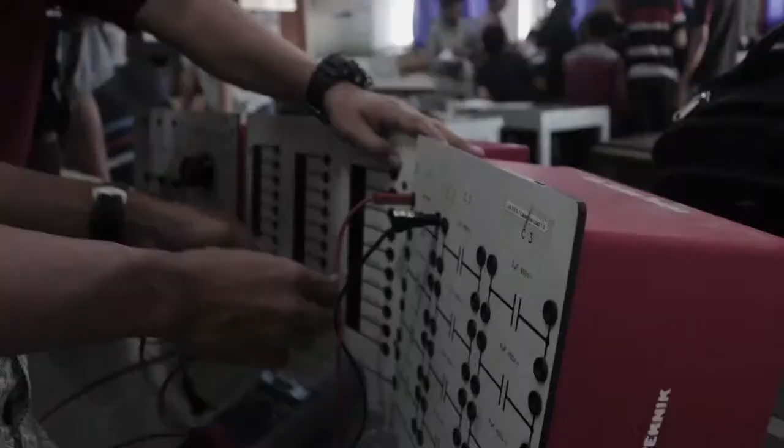Nurturing talented youth to become future leaders who eagerly pursue the truth based on faith and piety gives Mataram University a firm ground to contribute at its best to the society. In 2018, Mataram University is ready to answer the call with 9 faculties, 58 departments, study programs, postgraduate programs, vocational programs, and diplomas.

Faculty of Economics, Faculty of Animal Husbandry, Faculty of Agriculture, Faculty of Law, Faculty of Teacher Training and Education, Faculty of Engineering, Faculty of Mathematics and Natural Science, Faculty of Medicine, Faculty of Food Technology and Agro-Industry, and Study Programs including Communication Studies, International Relations, and Sociology.

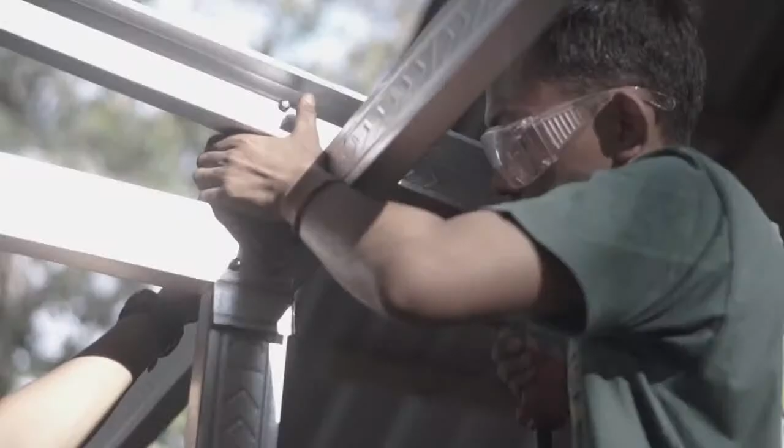We have tasted the same hard times. We have swallowed the same sour times. We have passed through the storm of challenge and stayed strong.

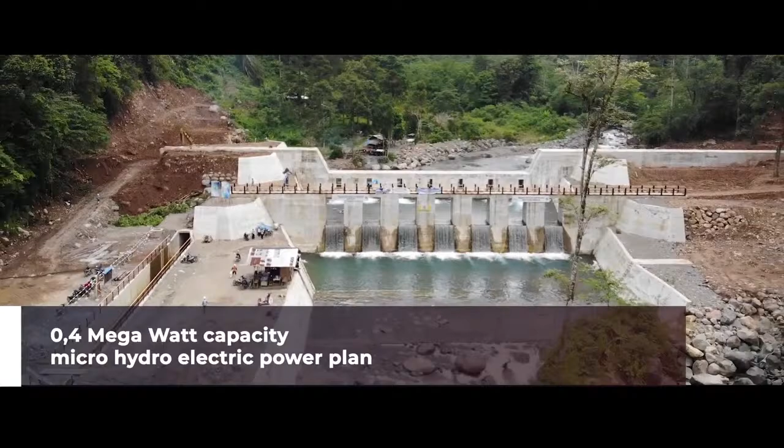During their studies, students are involved in character building, reflected in a variety of relevant activities, engaging faculty members and communities. Summed up in the acronym SEJATI, which means patient, empathetic, honest, fair, responsible, and sincere.

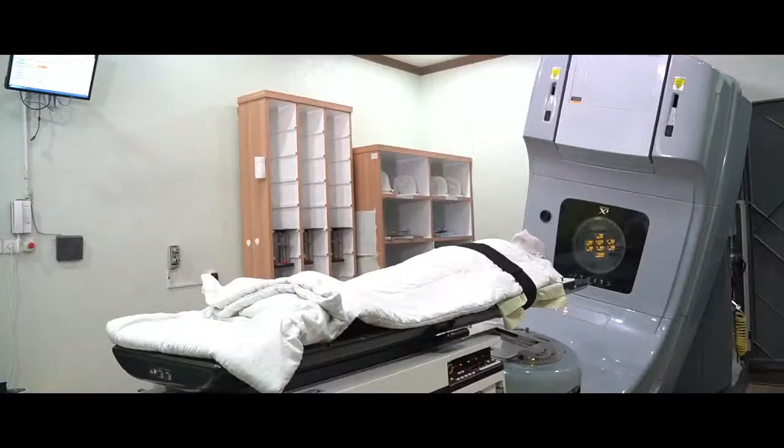Interdisciplinary knowledge, in consultation with key industry experts, enables the faculties to develop programs that will better prepare students for working in industry. It has resulted in close industry links being built through strategic alliances with trade associations and key industry partners. Here the student is not only the dreamer, but also the doer who is proud of making things happen.

Andalas University is committed to realizing its vision of becoming a leader in innovative university education by integrating learning, industry, and community.

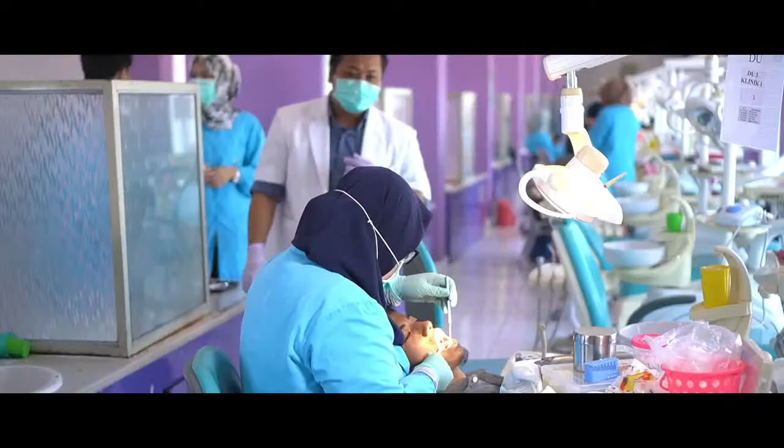The university always encourages lecturers to create innovations based on science and technology, which are then delivered to the community through research institutions and community service.

Andalas University applies continuous quality improvement, improving internal quality through conducting internal quality audits, and designing a curriculum that meets the needs of stakeholders, that is, the world of work and industry.

In an effort to produce graduates who are highly competitive, Andalas University also prioritizes entrepreneurship education for students.

In an effort to be an international campus, Andalas University is preparing to become a state university. Various efforts to this end continue to be conducted.

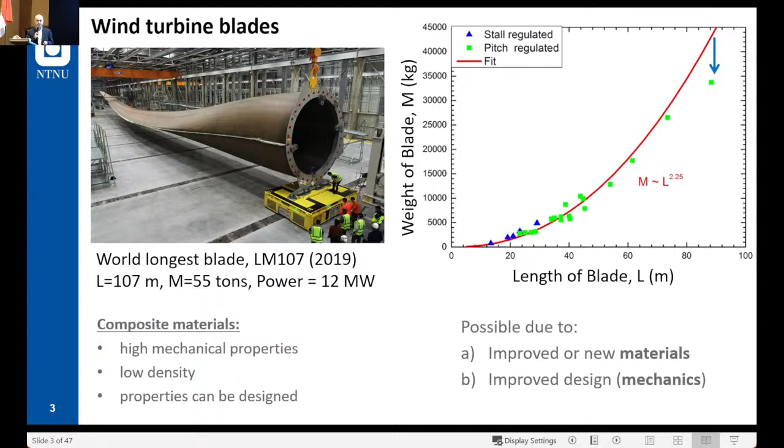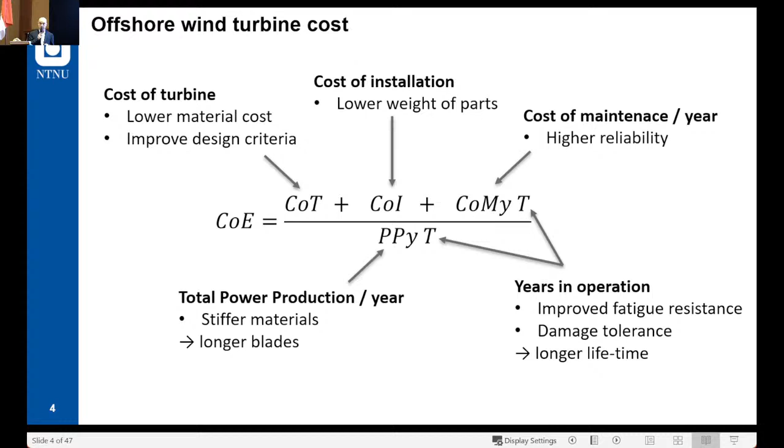Now imagine that through better materials and better design, we can reduce the weight of the blade by 20%. This will have a direct effect on the levelized cost of energy by 2%. This 2% is a quite high number if we imagine that the farm will operate for 20 or 25 years. So we can see how important it is to reduce the blade mass.

Now imagine that we can use very expensive composite materials like carbon fiber composites, and we can increase the blade length by 50%. That means we produce a lot more electricity. However, the levelized cost of energy increases by 2%. That's a very typical example in engineering - you always have to find a balance between performance and cost. The best material doesn't mean it will give you the best outcome, and my presentation later will reflect this balance between cost and performance.

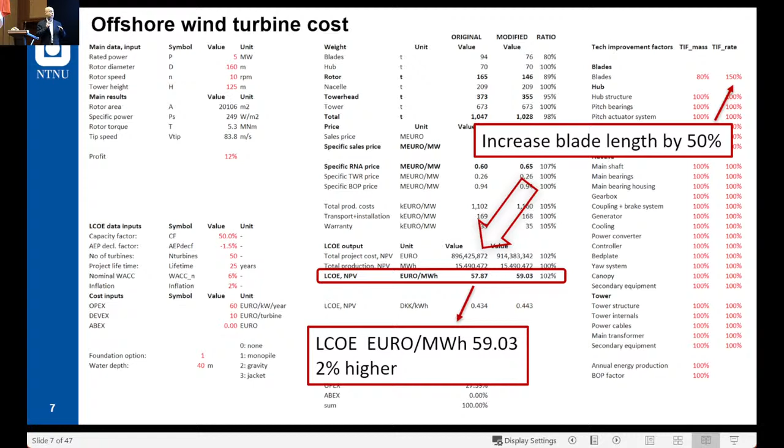So if one wants to calculate or optimize the design of a wind turbine blade or any composite structure - what I'm presenting here, I'm using turbine blades as an example, however the method is applicable to other structures like aerospace structures - we have different scales. We start from the structural scale, which is the blade.

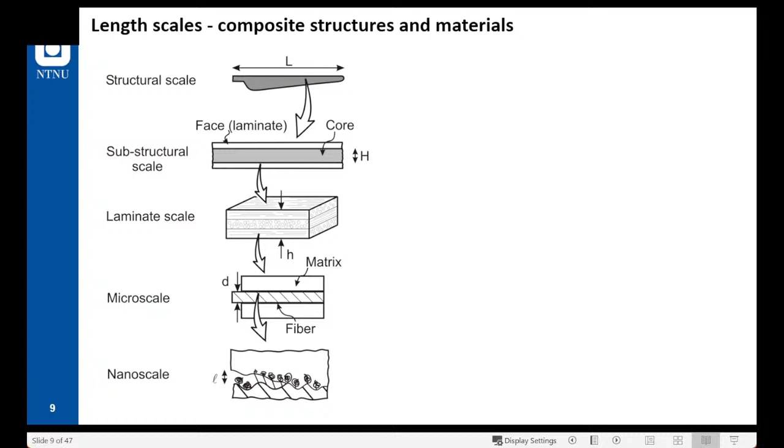At different scales, we have different damage modes. I won't go through the full list, but at the structural scale, we can see deflection or buckling. At the component level, we can have delamination between the skin and the core. At the laminate level, we can have fatigue or transverse cracks. At the micro scale, we can have fiber failure, matrix cracks, or fiber-matrix debonding.

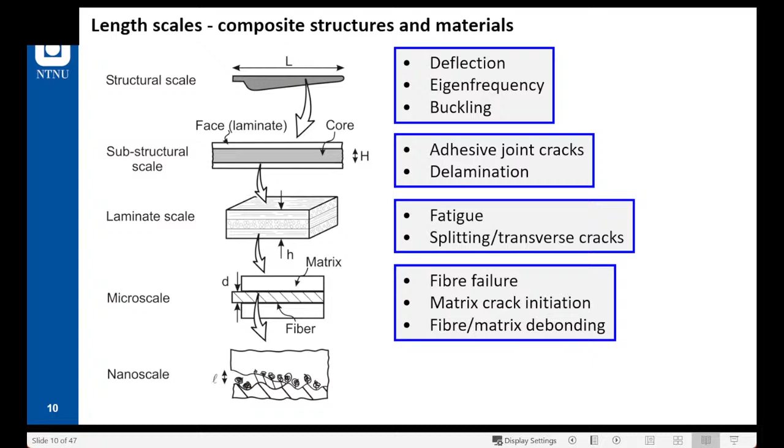As we move to longer blades, it's very important to introduce the concept of damage tolerance, or damage-tolerant structural design. That means our blade should be insensitive to defects, or in other words, the first mode of damage should not lead to failure of the component. Secondly, we have to develop damage-tolerant materials and interfaces, meaning damage should evolve slowly, or sometimes even stop growing. But it's also important that the damage grows to a size that can be detected by non-destructive techniques. That's the only way we can understand that our blade is being damaged at some location.

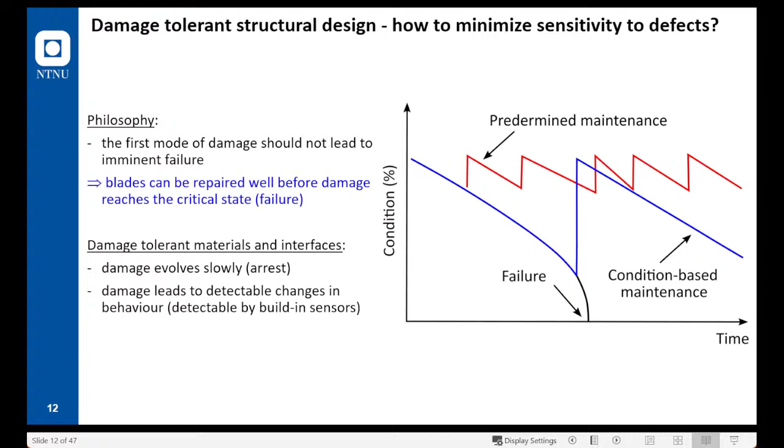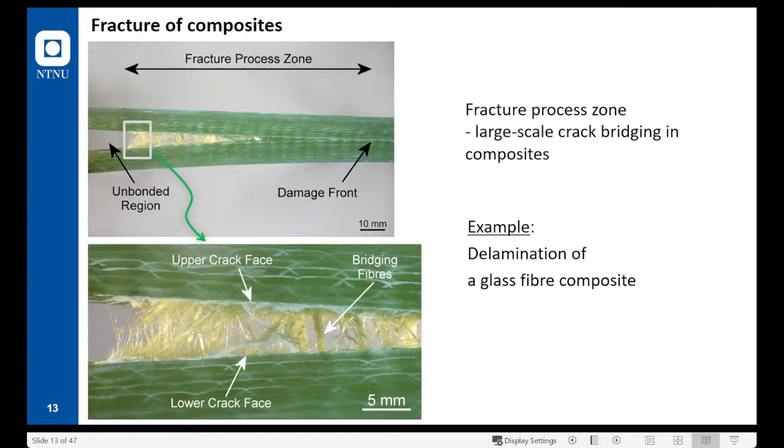Now, from these observations, we have to move to a mathematical tool that we will use in our design. The tool I will use is called the cohesive zone, where the damage zone we saw before—the crack tip here and the bridging fibers—can be replaced by a traction separation law.

One will notice there is a difference here. Usually in mechanics we have a stress-strain curve, but I have replaced the strain with opening. Since opening has units of length, we directly introduce a length scale into our calculations, and this length scale is directly related to the microstructure of the material. It's also one way that allows us to move from one scale to the next when we model a structure.

Now let's see in more detail what a cohesive law is.

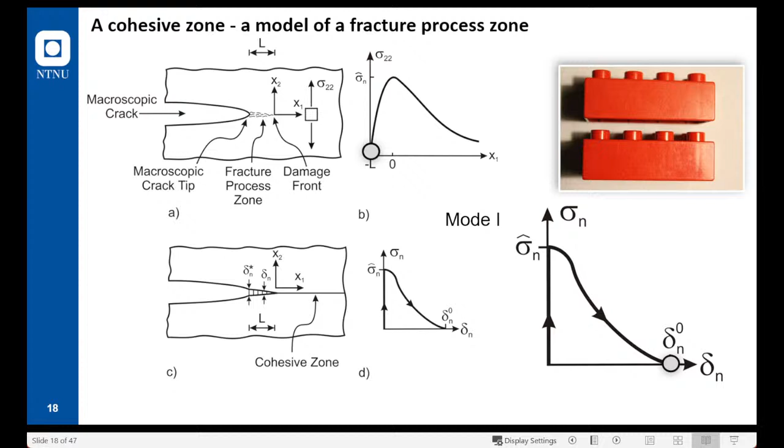Now I have defined the concept of cohesive law. The next step is how we can measure cohesive law in practice, because a cohesive law is a material property, so one should be able to measure it from experiments.

For simplicity, I'll give only the mode 1 cohesive law: normal opening on the x-axis and normal traction on the y-axis.

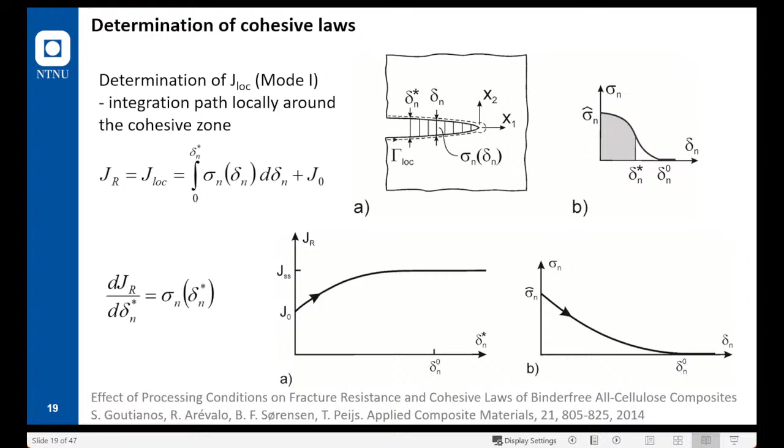When one develops an experimental technique, one should try to avoid errors. In most cases in the literature, the force is applied by forces. Here we apply moments, and when you apply moments, the J integral is independent of the crack length, so you don't need to measure the crack length, which can introduce a lot of errors when you calculate the J integral.

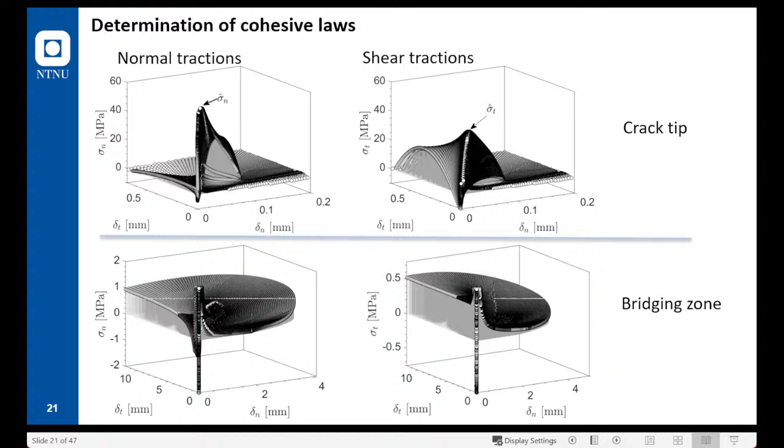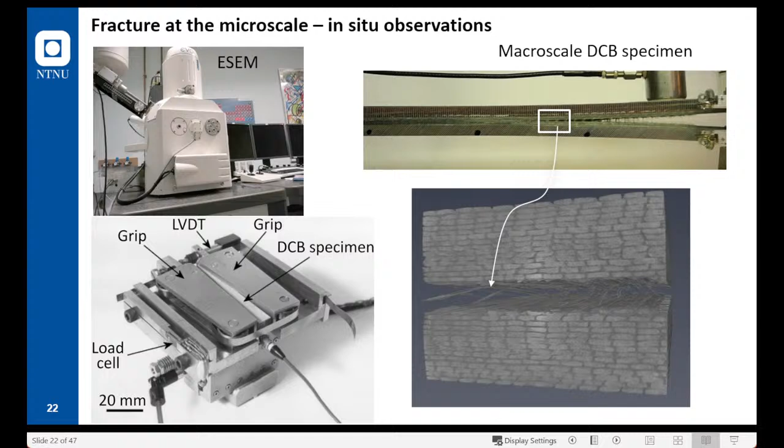By doing such an experiment, we can understand how damage starts to initiate at the micro scale, and eventually evolves into a crack at a higher scale, in the macro scale and at the component level.

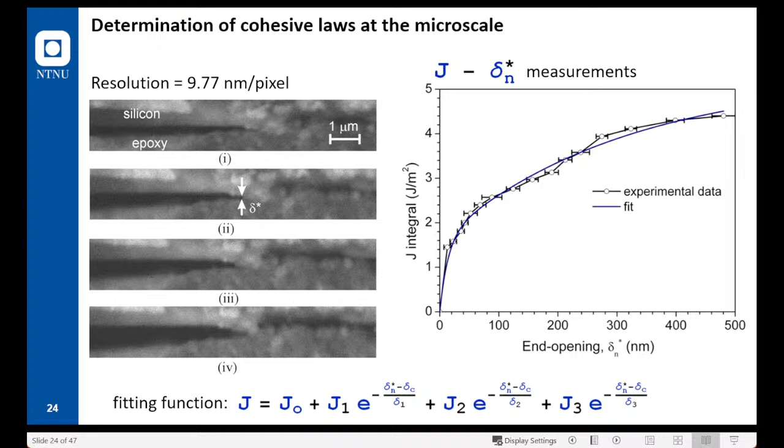We can also extract the cohesive law at the sub-micron scale. I have used the same fixture as before, and a silicon plate to model the surface of a glass fiber attached to the epoxy. In principle, we examine the cohesive law between the fiber and matrix. Again, we increase the load and record the end opening and the J integral, and the derivative of that gives us the cohesive law at the interface, which can be used in a finite element code.

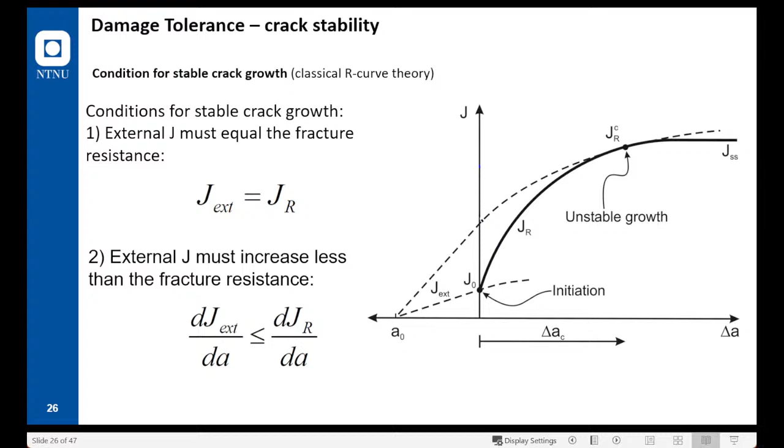Now I will talk a little about crack stability. We have said that damage tolerant means that the crack grows slowly. That means the energy provided to the system as the crack grows should be lower than the derivative of the fracture resistance with respect to the crack length. I have skipped many equations in between, and this is our criteria for crack stability. It's a nice equation because it says that both the material properties through the cohesive law and the structural properties will affect the crack stability. Again, both material science and mechanics are necessary to obtain a damage-tolerant composite structure.

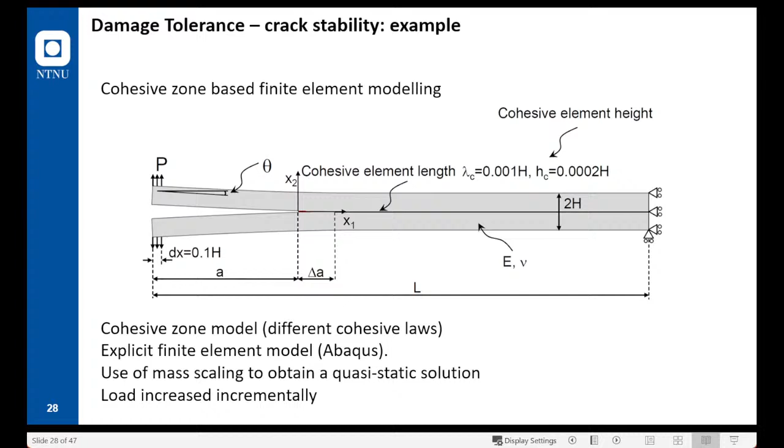Based on these results, we went back to the lab, and through chemical modifications at the fiber matrix level, we were able to modify the fracture energy corresponding to the bridging zone, and we were able to increase the fracture resistance of the composite by 3 times. So from the modeling, we went to the experiments, modified the material, and managed to increase the fracture resistance by 3 times.

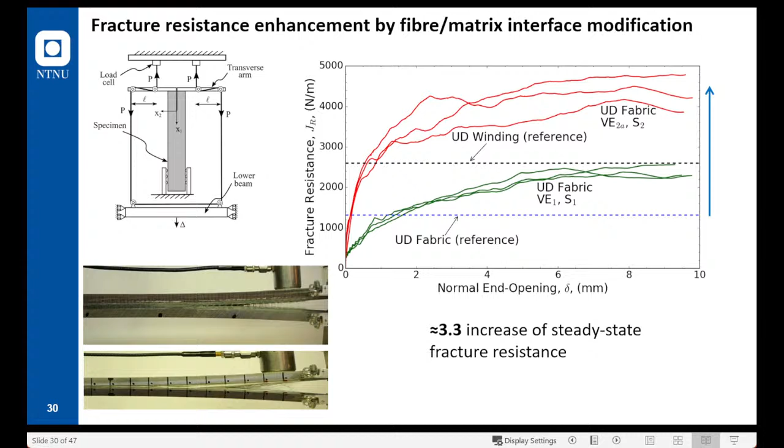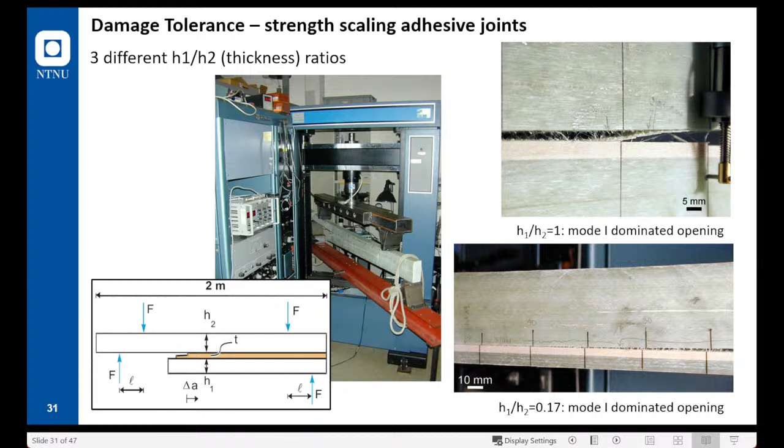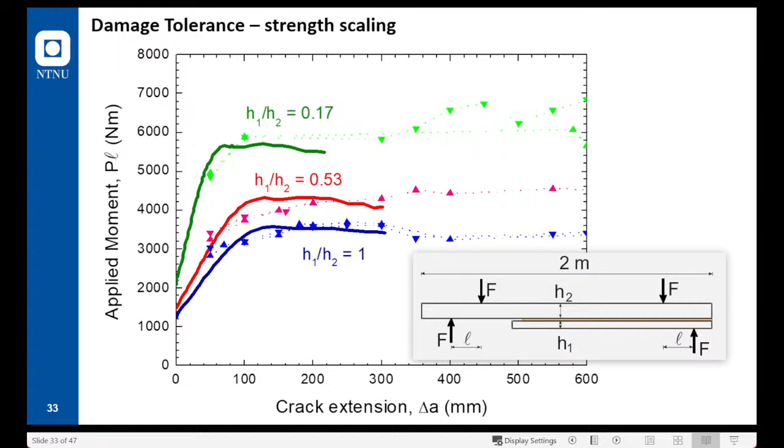In practice, we do experiments at the macro scale. You can see the length of the specimen here. We extract the cohesive laws for different mode mixities, and we model the behavior of the specimen. We can see that we can predict quite well the behavior of the 2 meter beam from data from the different lower scales. So we see how the cohesive law can be transferred across the different length scales.

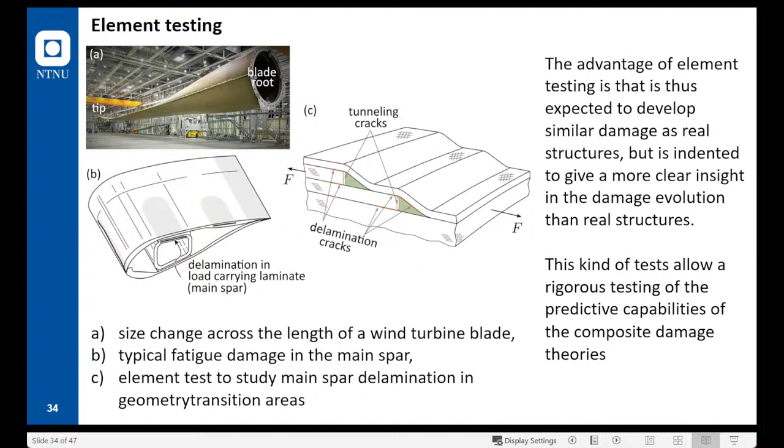When we design a component, quite often we base it on specimen testing. In practice this is not always the best approach because we have many structural features that initiate cracks. So we have to move, as is happening nowadays, from component testing and specimen testing to element testing, which can represent structural design features in a simplified way. We have accurate load introduction, and we can follow how the cracks will evolve with the number of cycles. And we can make damage failure maps and identify which crack is the critical one.

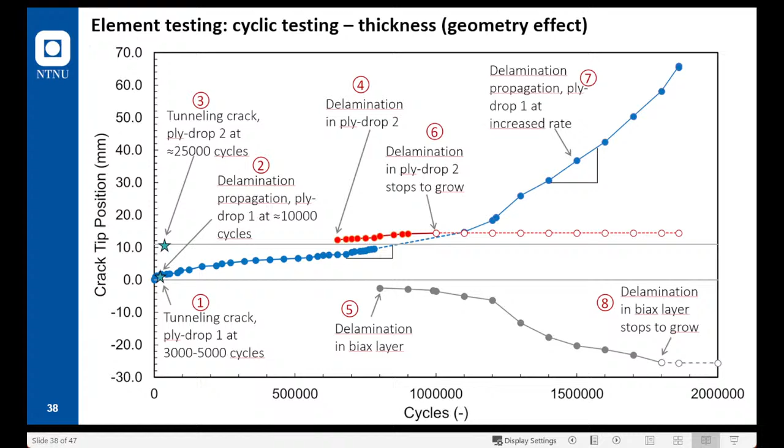I can skip this slide. Now, instead of conclusions, I will talk about future trends, because the time is almost over.

Nowadays, we are moving to probabilistic design, and the design now is based on calculating how many blades we are allowed to fail. For example, based on our design, we can allow that one blade will fail out of 100 blades. The drawback of this probabilistic design approach is that it says one blade will fail, but not which blade will fail.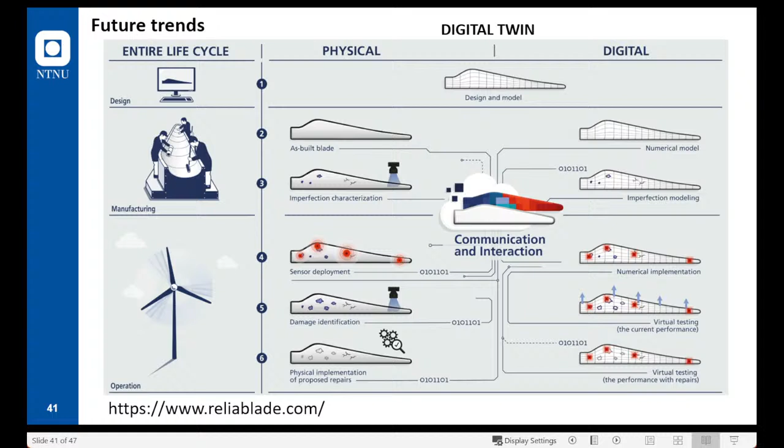And that's why now we move to the digital twin approach, where we have our physical wind turbine blade. All the manufacturing imperfections or processing details can be transferred to a digital model. In the same way, all the damages, when detected, can be transferred to a digital model where we can make predictions and decide how we can operate our wind turbine blade. And with that, I would like to thank you for your attention.

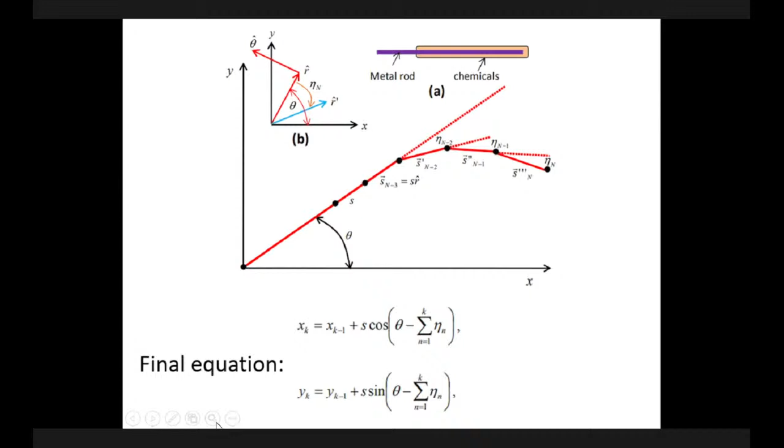Maybe not many people ask this question, but I thought this is very interesting - maybe a physics equation can be used to explain this phenomenon, this geometry. So our work was to develop a physical theory and equation to explain the bending behavior and geometry of the firework. We proposed a hypothesis, derived the equation, and finally obtained the equation to explain the bending of the firework rod.

This is the equation, and we also did an experiment using a fire rod about 40 centimeters long. The comparison between our theory and the data is pretty good. The black one is the experiment, and the colored one is our theoretical prediction. This is a very nice agreement between our theory and the simple experiment result.

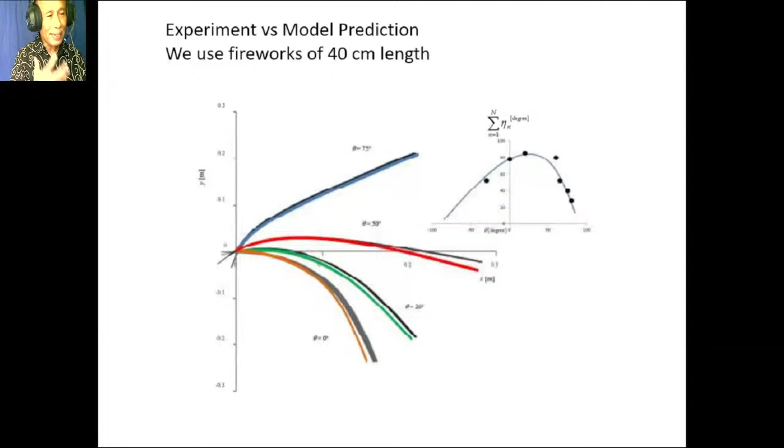Now, what is the price, the budget for this research? It is about several hundred thousand rupiah, less than 1 million rupiah. So with a few hundred thousand rupiah, we can obtain one paper in a very reputable journal in physics related to education. We obtained this paper just by buying fire rods, several packs, developing theory, doing a simple experiment, and then obtaining the data.

This is the next one. We always do this, maybe every day: before drying the clothes, we rotate the cloth to remove water, then put it under sunlight, and then the cloth will dry. This is simple, we do this every day, but we never think about the physics behind this activity, the science behind it.

Our observation is, if you do this at home, if we rotate the cloth, at first the water doesn't come out. But if we rotate many times, the water comes out, and as we increase the rotation number, the water stops. The question is, are there physical equations to explain the coming out of water when we turn the wet cloth?

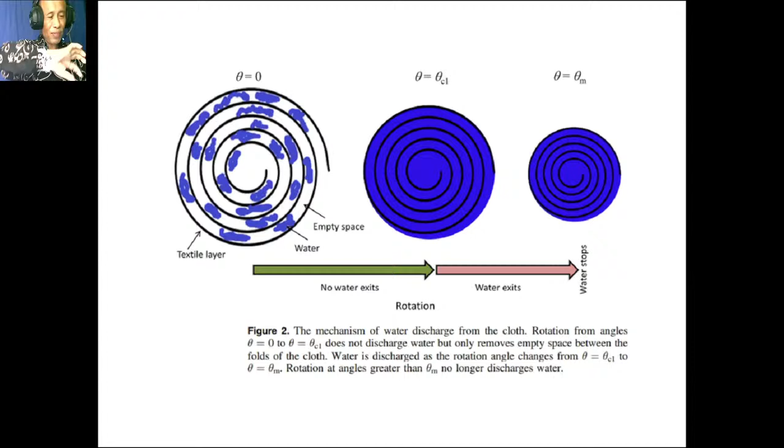So we derive a physical equation to explain the process. We hypothesize that initially the cloth contains water and also empty space between water inside the wet cloth. If we rotate the cloth, we just remove the empty space. If we rotate again, we remove water, and then finally we cannot remove anything. This is our hypothesis for the process of turning the wet cloth.

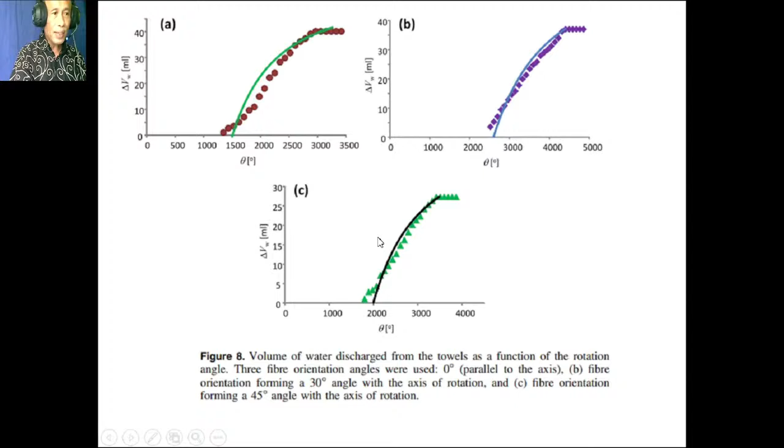We find the symbols represent the experimental data, and this is the theoretical prediction, our model results. Finally, we compare all of the experimental data, and it falls in one single equation from our theory. We see that the experimental data are in agreement with our theory. This is experimental data for many kinds of cloth, towel, and batik.

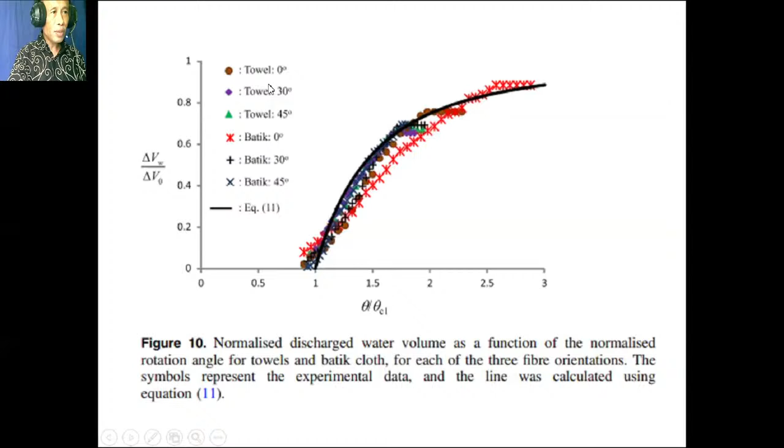Finally it ended up in this paper, also in the European Journal of Physics. This is related to education, but it is a high quality journal in physical science.

If we observe, just by folding and rolling, the sarung attaches strongly to our stomach. If the number of rolls increases, the attachment gets stronger. And if the pressure of the sarung on our stomach increases, the attachment is also stronger. So the question is, are there any physical equations to explain this phenomenon? It's an everyday phenomenon, we do it every day, but we never think about it.

So I did experiments to measure the pressure between the sarung and stomach. This is me, I did the experiment at home, and we designed a simple experiment by measuring the difference in water level inside the pipe.

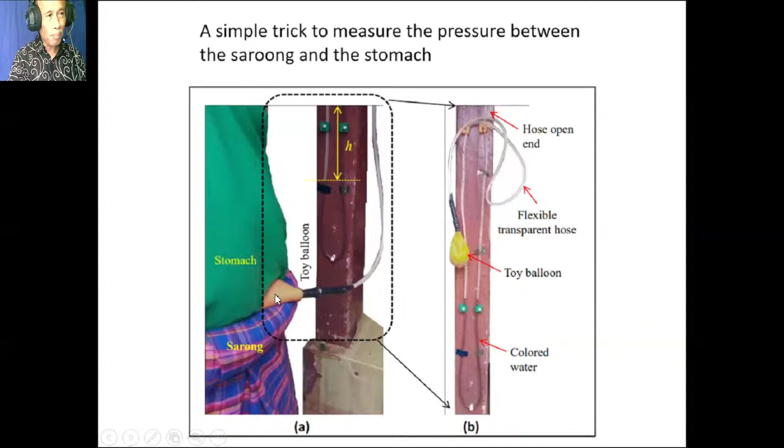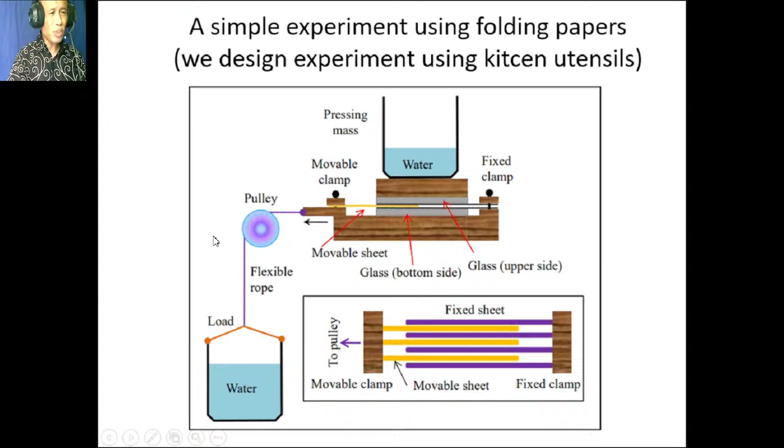From the difference in water level, we can determine the pressure of air in the balloon. This is the balloon experiment, and we also designed it using kitchen utensils. This experiment is very cheap, maybe several 10,000 rupiah, we can obtain this equipment.

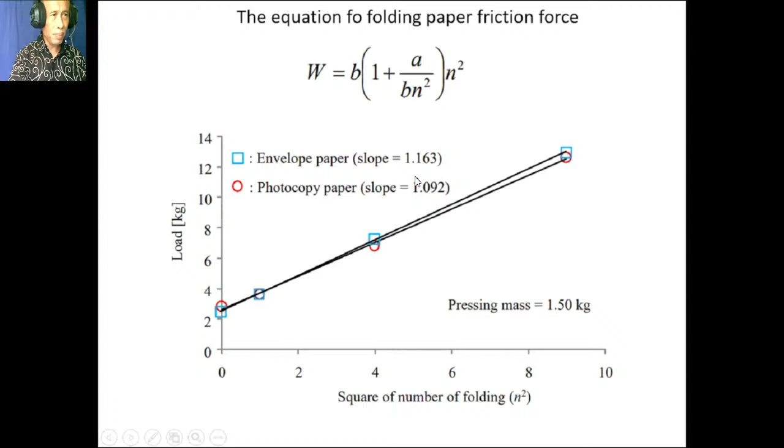We also did an experiment using photocopy paper. We fold and roll the paper, and this is the data we collected, which we compared with the theory prediction. The symbol is the data. We obtained good agreement between the theory and the experimental data. Symbol is the data, line is our theory prediction, and this ended up in a published paper.

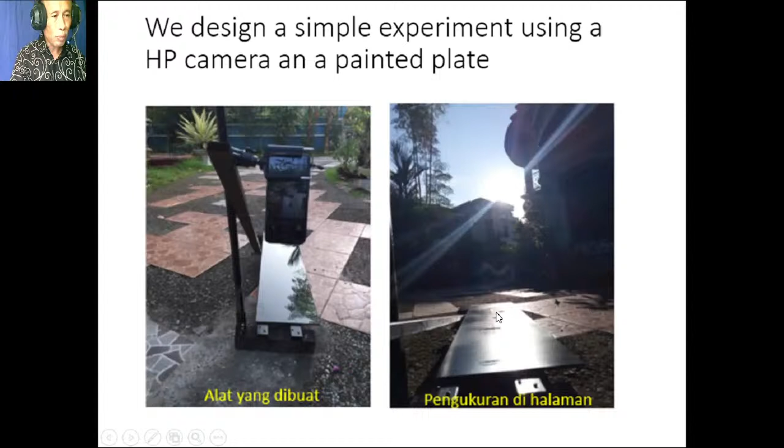To answer this question, we did an experiment at home during the COVID-19 pandemic. We designed the experiment at home using a camera and a model road made from a plate, painted black to imitate the road, with a white stripe. This is the equipment we made: the imitation road and camera.

We took images of the road surface under dry and wet conditions, and we also did an experiment using a photoresistor and light source to determine the transmission of the road surface. We also developed a model, and this is our experimental result.

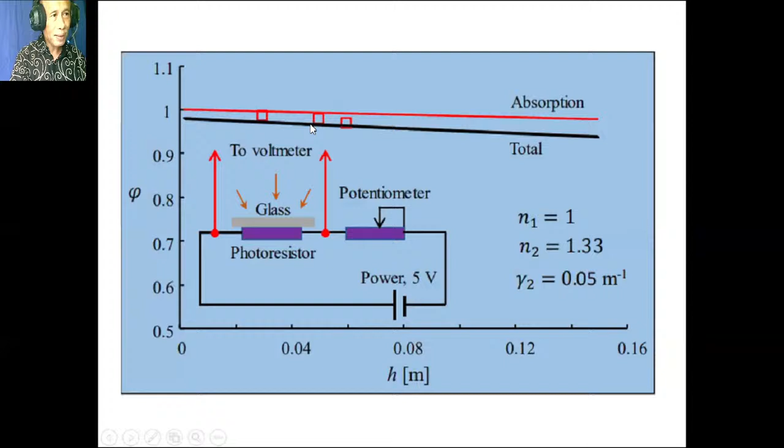This is the experimental result, shown as symbols, and this is the theoretical prediction, a very nice agreement. This is just simulation compared with the experimental result, and our theory shows good fitting.

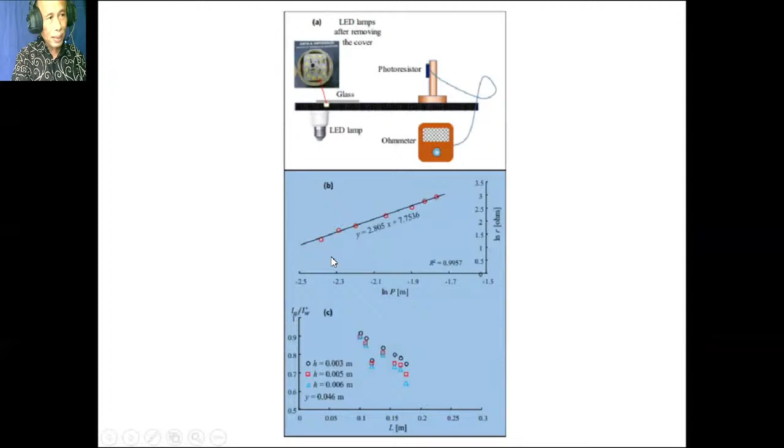Finally, we also examined the color spectrum of the road surface. This ended up being published in the European Journal of Physics, which is a good journal in physics education from the European Physical Society.

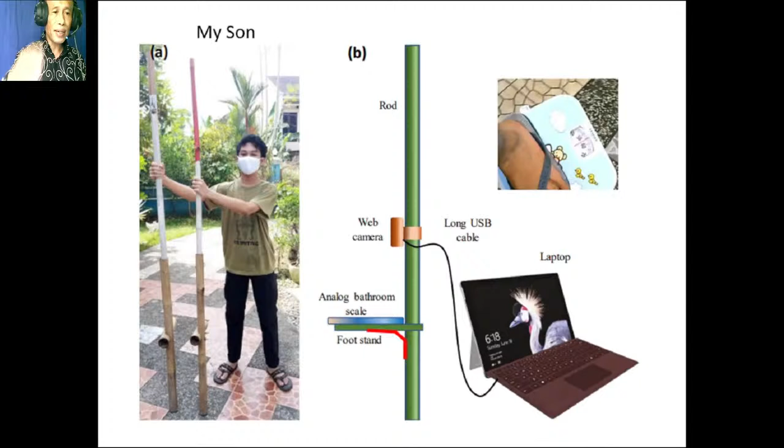We also determined the foot pressure while he was playing the stilt. We measured this using a camera placed here, along with a bathroom scale, observing the movement of the scale needle, and from that we determined the time dependence of the foot force.

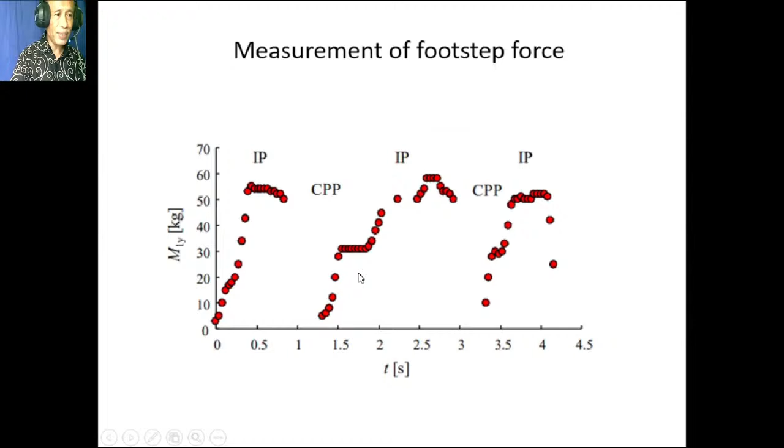We obtained this data, which is our observation of the dependence of footstep force on time based on the video recording. This is the comparison of the collected data with our theoretical prediction.

This is also related to physics education, but we can produce papers in a high quality journal with a very small budget. Maybe we can enjoy this especially in Bali.

It's a very long tail, about more than 100 meters, and it oscillates beautifully when playing. The idea for this research originated from a YouTube video. I was watching a video related to large kites in Bali, and I saw the oscillation of the tail, and it's very beautiful. The question is: is there any physical equation to explain the oscillation of the tail? This research is very cheap, but very beautiful. Are there any physical equations, or do we derive an equation based on our experience and understanding in physics?

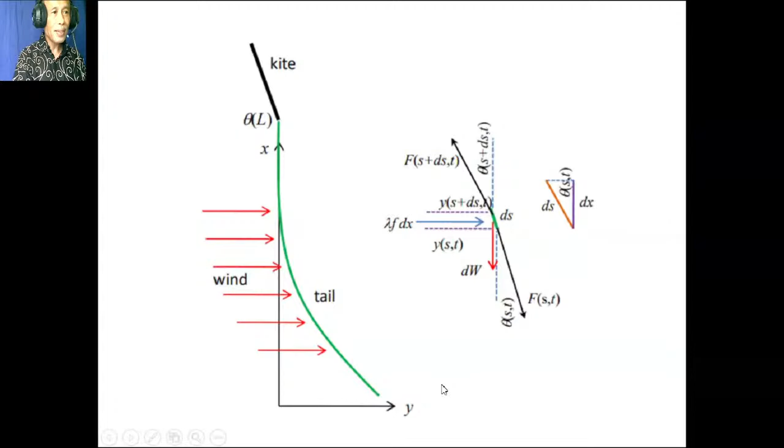This is the kite tail. Wind blows, and gravity acts together to control the shape of the tail. We obtain three types of bending - the first one, second one - and you can read more from our paper. Finally, this ended up in this journal. Just by watching a YouTube video, we were able to obtain a paper published in a good journal. This is very cheap research.

This is also another one of our research projects. If we use a frying pan and put butter on it, we see that the melting process starts from the bottom of the butter and then goes up until the butter finally melts, starting from the bottom, from the heated portion. Now the problem... excuse me, one more minute, thank you.

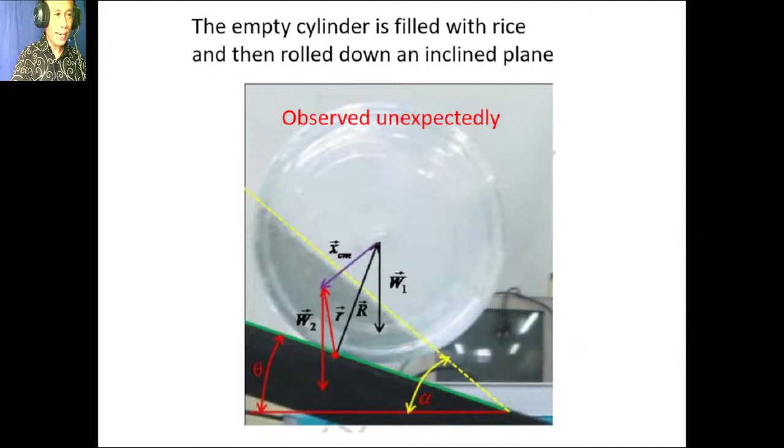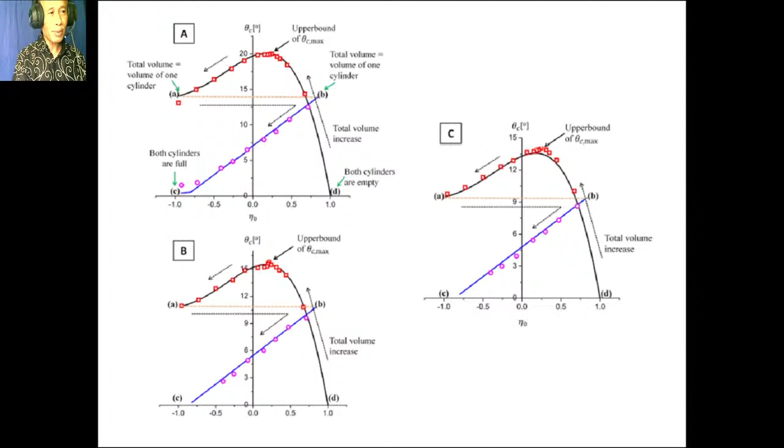We continued this research using a cake box. We developed a theory, did experiments, and finally obtained this paper, also in Powder Technology.

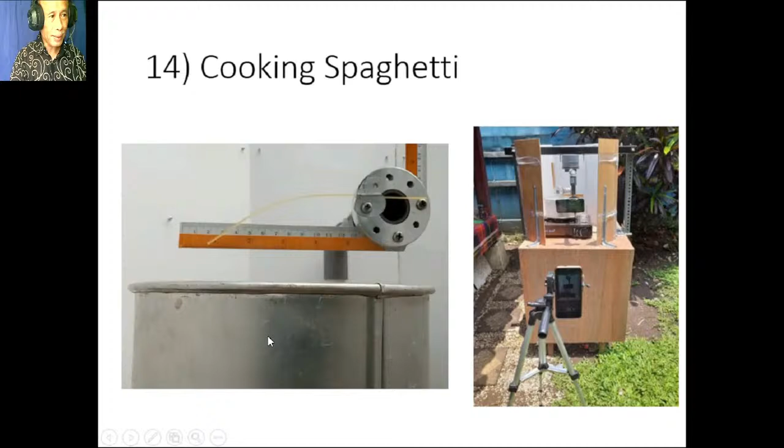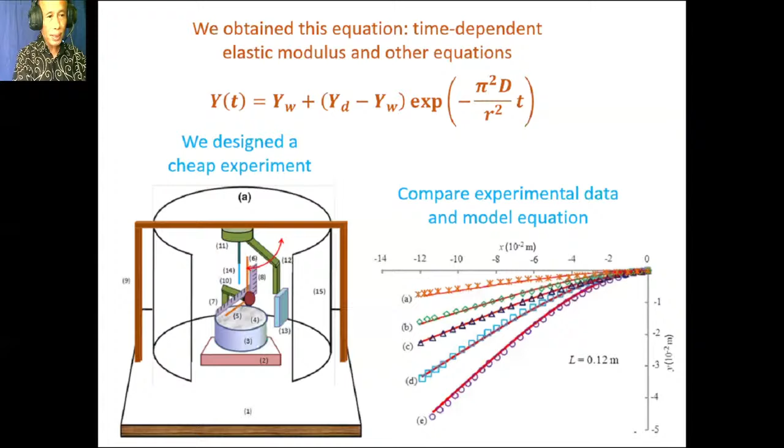We also did this experiment at home during the COVID-19 pandemic - a simple experiment with a camera, using spaghetti. Most of you have probably had the experience of eating spaghetti. We did the experiment and theory - theory shown as a line, experimental data shown as symbols - and ended up with this paper.

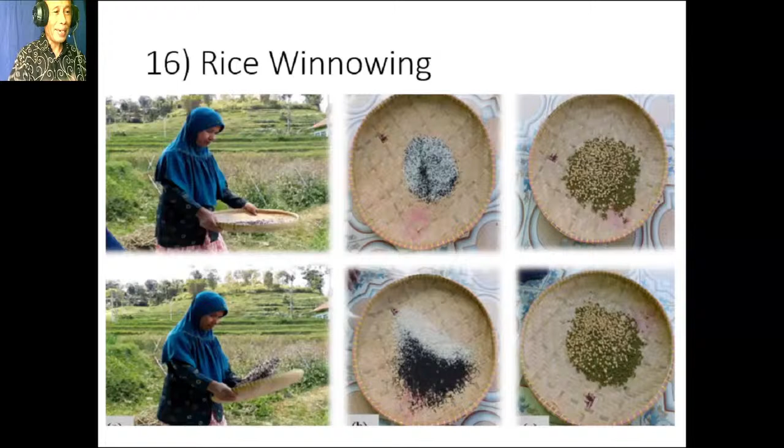This is also a traditional activity - winnowing rice to separate the small and larger grains. We developed a simple experiment, used simulation, and ended up with this paper on winnowing.

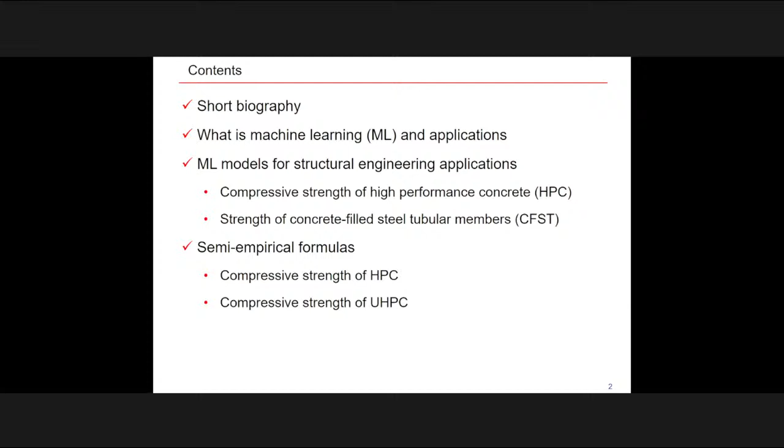So that is a bit about myself. I got my doctor degree in South Korea in 2010, and after that I went to University of Liverpool to work as a research associate in 2010 and 11. At that time I met one of your colleagues there, Professor Buan, who was doing his doctor degree there at the time. So that's when we met him. It's quite a long time now, around 10 years.

Now I'll just give you very briefly an overview of machine learning models. The idea of a machine learning model is just using a computing-based system to extract patterns, fit data, and classify data. So the machine learning system learns and improves with data, and it's just a combination of theoretical computer science and real noisy data.

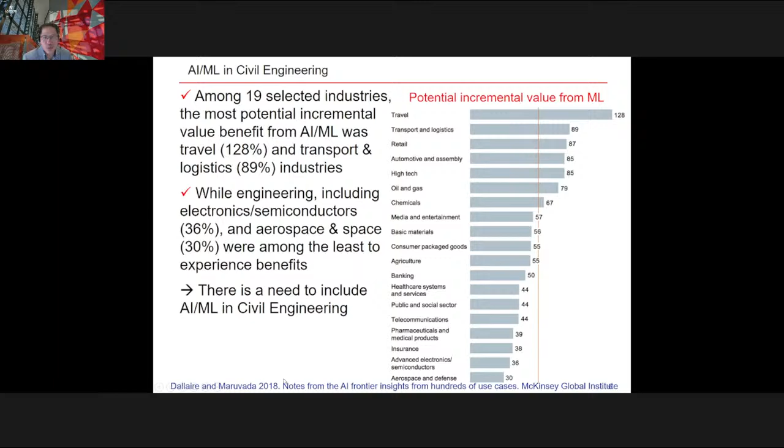However, in terms of engineering, we talk about electronics, semiconductors, and aerospace, and the percentage is quite low—around 36 to 30%. So that's the reason why I think there's a need for machine learning in civil engineering. That data has probably changed now since I took these figures from 2018, so probably a lot of things have changed.

In terms of civil engineering applications, machine learning can be used for several main areas. The first area is predicting structure response and performance—dealing with building models, building response, and building performance. We can deal with information using images or written text data. Another area deals with recognizing patterns of structure health monitoring data.

The last area, and the main thing my research focuses on, is trying to translate and interpret data from experiments, and also dealing with simulation data. So when using Abaqus modeling, we try to get the data from there, and then we try to use it for experimental purposes.

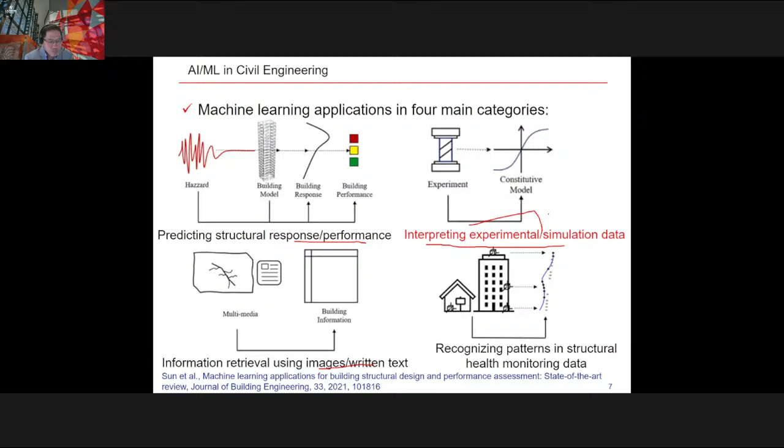So it's mainly for concrete. Briefly, high performance concrete and ultra high performance concrete are used quite a lot in tunnels, bridges, pavements, and some high-rise buildings because of their strength and very high modulus of elasticity. For ultra high performance concrete, the compressive strength can range from 150 megapascals to 800 megapascals.

Another area we also work on is composite steel or concrete-filled steel tubular structures, mainly used for beam frames and floor frames. We call these concrete-filled steel tubular structures—the concrete is filled inside, and the steel structure covers the outside. It can have a circular section or a rectangular section.

The big problem when dealing with experiments is that we have many components, for example with concrete. If we talk about ultra high performance concrete, we're talking about 15 ingredients. So if we do an experiment with 15 of them, and 5 different values for each of the 15, the total number of experiments we need to test becomes a very big number.

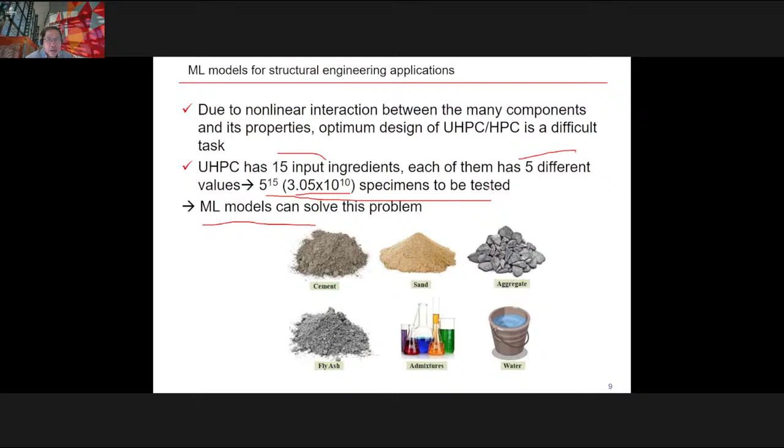It's a very big number, so that is very challenging. It could be time consuming in terms of money, cost, and everything. That's why machine learning models can be used to solve that kind of problem.

When we talk about composite steel structures, modeling that kind of thing can be time consuming when you do experiments and finite element analysis. Because of the nonlinear relation between input and output variables, the same applies exactly with concrete experiments.

We can deal with that kind of problem using machine learning models. So the framework of machine learning models can be summarized here. We collect data from either experiments or from commercial finite element simulation.

What we need is a mapping between the output and input. What you're looking for is what kind of parameter study, what is the geometry, what is the material property - that's what we call the input. What we're looking for - compressive strength, shear strength, bending strength - that kind of thing we call the output variable. So we're mapping them, we know what we're looking for.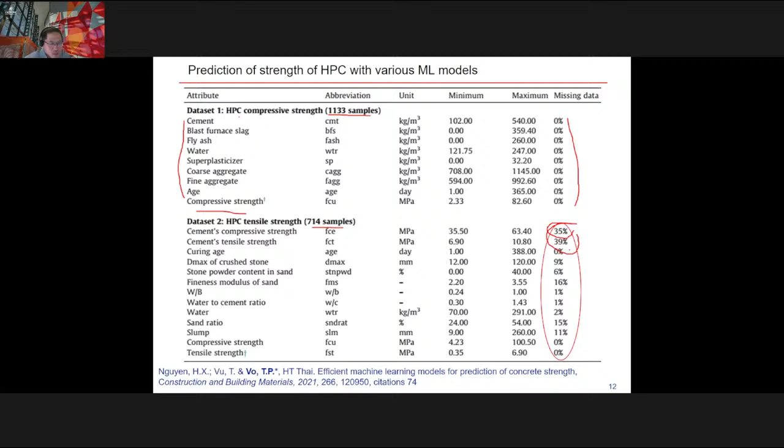This paper we published last year. We try to get the compressive strength and compare with other people who did it before. So the two main contributions of this research are: we try to handle some missing data, and we try to get optimum values of hyperparameters, comparing with values from some people who did it before.

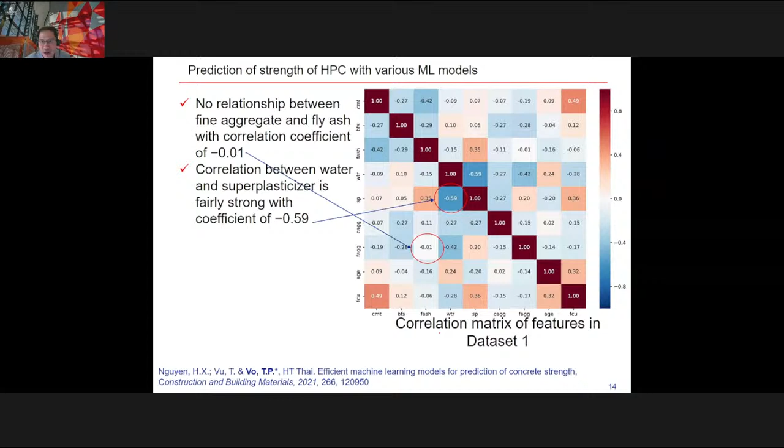We also try to get some correlation matrix for the features in the data set. As you can see, we get a full picture of the relation and effect of each ingredient on others. That is a very good thing about machine learning models.

That is a big advantage compared with other models, because we optimized the parameters and got the best performance. For this paper, we decided to publish the code. If people are interested in that kind of model, we're happy to share it - it's open access for this kind of problem, because that kind of problem becomes fundamental once we have the data set, and it can be used for different kinds of problems.

So the next problem we also try to do is with CFST. As I mentioned before, they have a different kind of section - circular section, and at the same time a rectangular section. So they have different kinds of long and short columns.

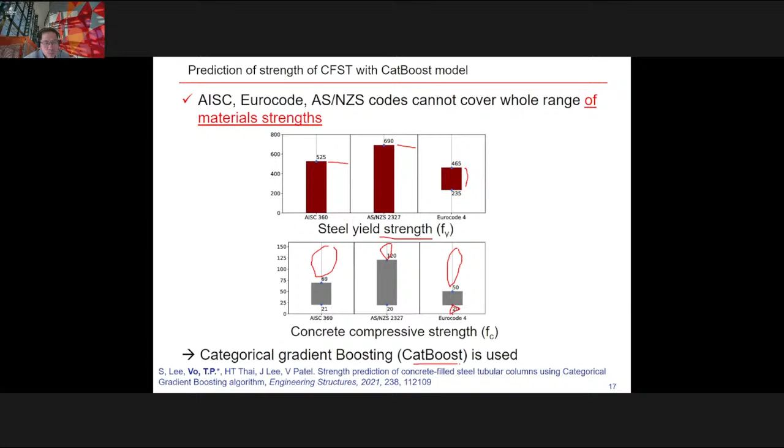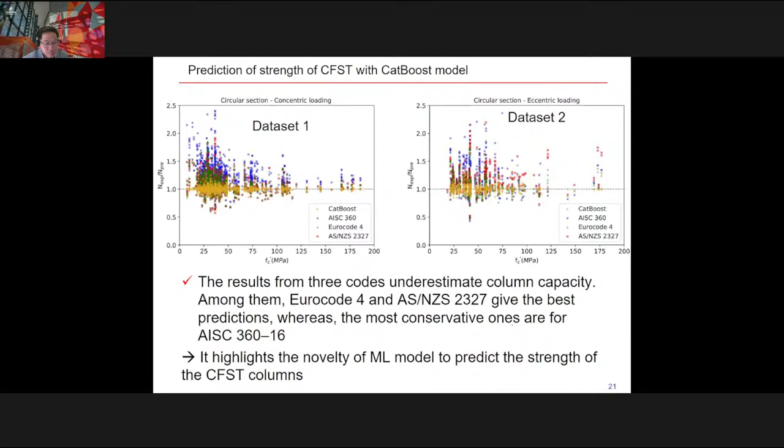So as you can see, I presented 2 problems we're dealing with purely machine learning models. As you see, it's very high accuracy, and it can predict well the problems we're dealing with. However, as you can see, there's some problem because it's mainly dealing with the black box nature. Even though it's a powerful prediction, there's some limitation - there's something you cannot explain, how it works.

So that's why later on we try to do something - it's not just mainly using what some people have done before, we're dealing with some explainable machine learning models, trying to explain the black box model to see how it works. In order to deal with that, we try to propose 2 ways.

The first way, we try to provide some semi-empirical formula, so we can see the relation with some ingredient, the relation between output and input variables. At the same time, we also try to present something we call a partial dependence plot, so you can see the relation between input and output.

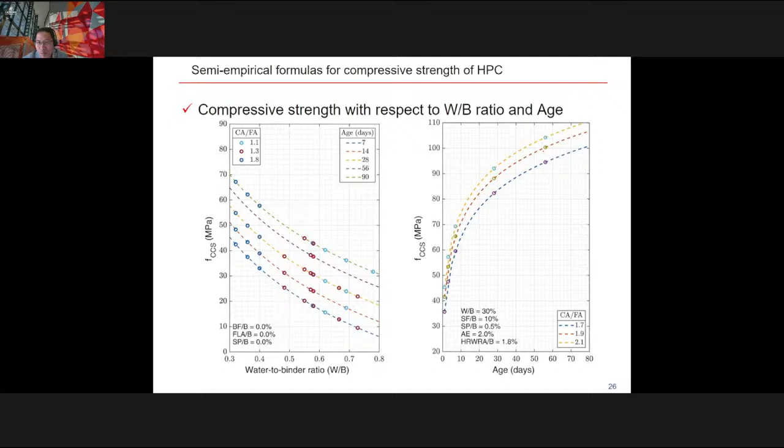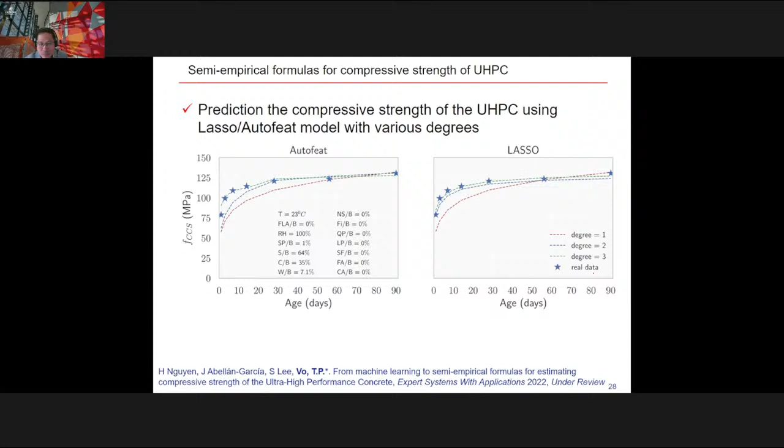We used two approaches here: Lasso and Autofeat models. As you see here, we also tried to compare with some experiment data. This one is the real data, the experiment data. You can see the accuracy is very good. R-square is almost 1, meaning very high accuracy.

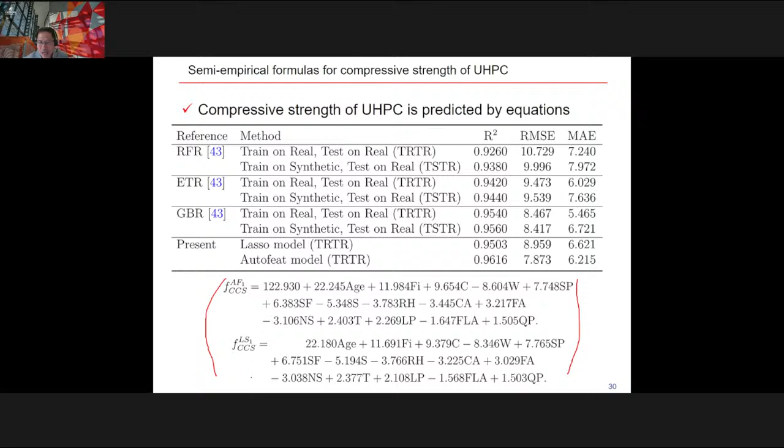Excuse me. Sorry? You have 5 more minutes. Oh yes, I'm nearly there. Thank you.

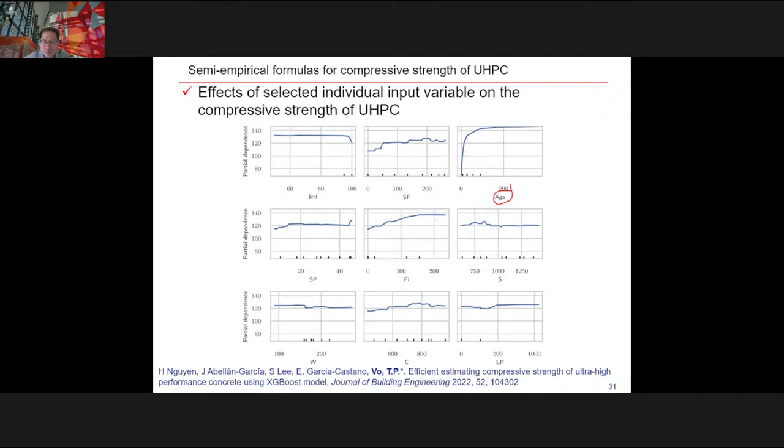You can see here we got the relation for one variable. For example, if we have longer curing time, we have strength develop more than that. This gives you some picture about the relation.

We also tried to provide a graphical user interface based on machine learning models. When you put in all the values here, you predict, and you get the values of the compressive strength, for example. If you want to see the relation between cement and slag, you just put it here and plot, and you can see the 3D relation between them. This gives readers a bit more detail about the relation between them.

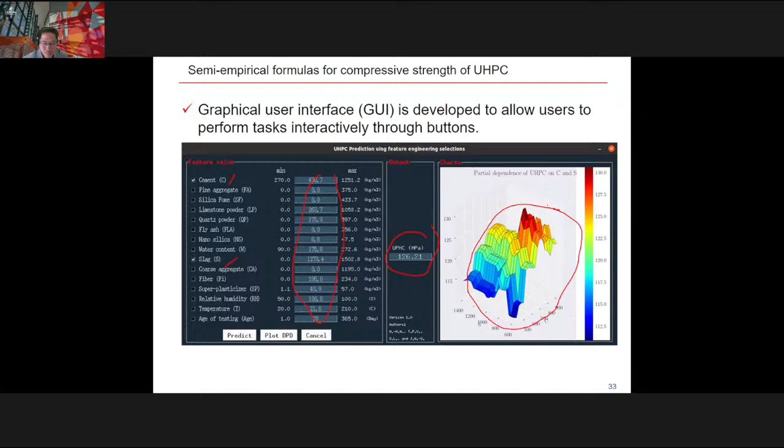That is the end of my presentation, and thank you very much for your time.

Okay, thank you very much. We still have 10 minutes for discussion, so could the participants of this conference please ask questions? Okay, Prof. Buan.

Hello, good morning. Oh hi, how are you, mate? I'm fine, thank you. Thank you for inviting me here. Okay, thank you very much. You look younger, I think. How many kids now? Oh good. Yeah, it's about 10 or 11 years since we met in Liverpool.